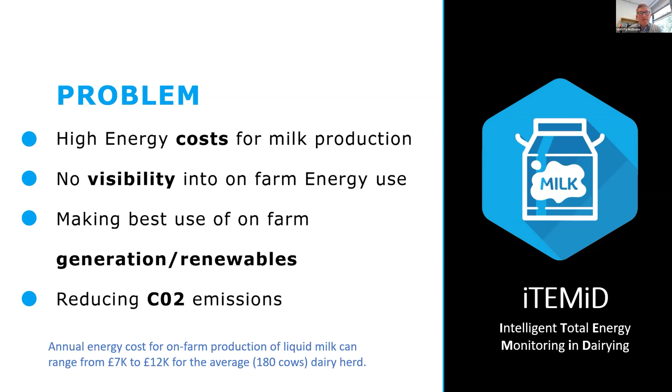And then if the farm had on-farm renewables, so if it had PV or if it had wind turbines, that was measured as well. And anything else the farmer had beyond that—farms have specific other niches and different bits of hardware—if there's something they wanted to monitor, we would do that as well.

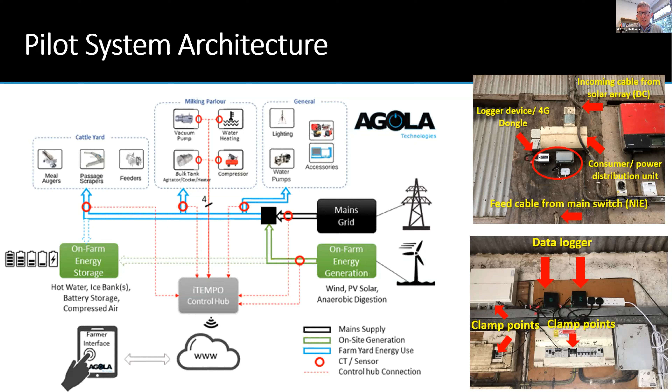Some of the things we took out of the initial analysis of the data - a lot of this was initially hand analysis through Excel and so on - in terms of the robotic farm, we identified an issue in late January, February, where the energy profile of the robotic system was increasing, and that manifested in a condenser issue within the robotic system. Once we identified that to the farmer, they could get the right service team, the Lely service team, out to fix that issue.

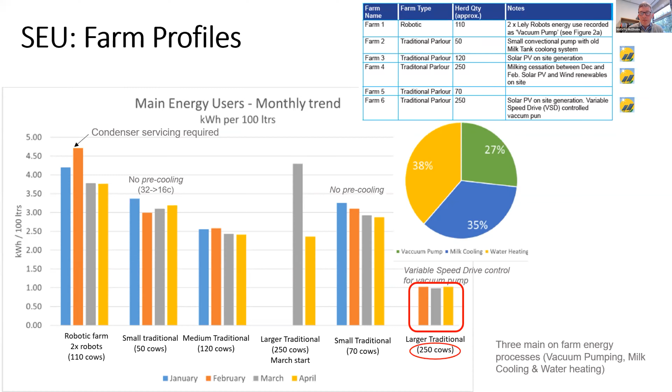So the obvious thing would be to time shift that energy use and use it either in the evening during milking, or more specifically at night for heating the water tank, because there's a similar profile on this particular day. The obvious solution would be to put in some sort of battery storage system so they could store energy during the day, charge the battery, and then use that stored energy to heat the water at night. But that comes with another significant cost, and farmers weren't looking to outlay that cost as part of this project.

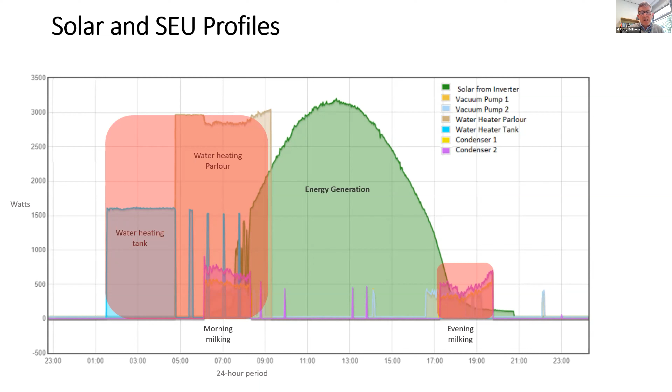So they're looking at other solutions, taking the existing systems they had and trying to maximize that energy generation. With that in mind, we looked at optimizing the water heating strategy within the renewable setup.

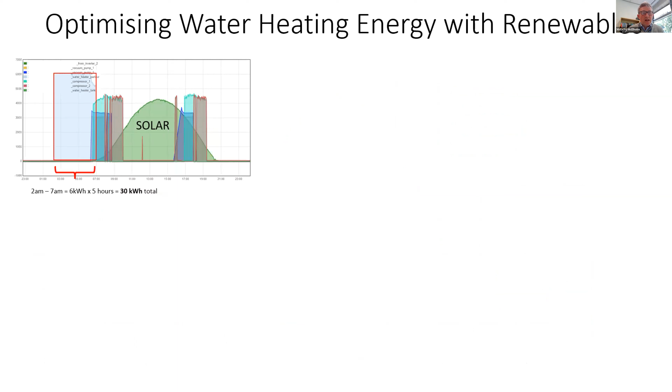Using that energy profile to heat the water, we came up with a controller algorithm and system to monitor both energy use and energy generation - what has been currently generated by on-site wind or solar - and use that to heat small elements of water. Depending on how much energy we had incoming from renewable sources, we could heat a certain amount of water and control the water inlet valve just to heat the water through the day.

This meant that when it came to nighttime, the temperature in the tank would have reached a certain threshold or level, and it would take less energy to heat it to the 70 or 80 degrees needed for the washing process.

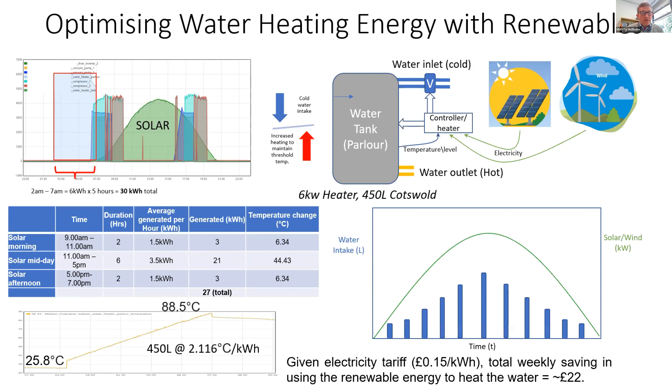The rest of the slide shows information around a typical day. During the morning and afternoon, the average generation was 1.5 kilowatt hours, totaling 27 kilowatt hours generated by the solar, which could have been used to heat the water during that time, rather than selling that generated energy back to the grid at a reduced cost. It's better, more efficient to use that energy on site.

We did some initial studies on this, and given a particular electricity tariff, there's a weekly saving of around £22, which doesn't sound like a lot, but over the course of a year it's over £1,000 to a farmer who may be spending £7,000-8,000 on electricity use. That's a significant reduction in their costs, and increases their profitability.

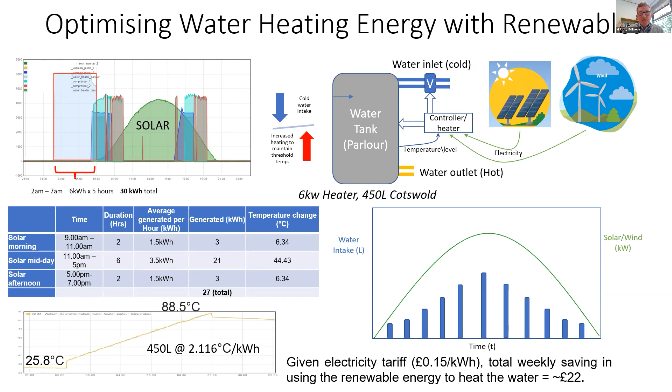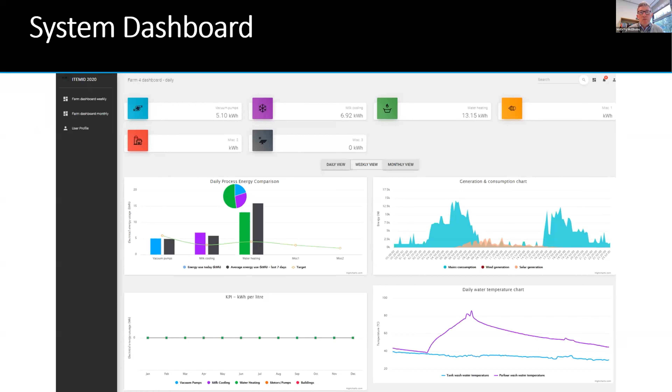In summary, this affords real-time insight into electricity consumption for the main energy users on a farm. It also highlights reduction approaches, such as potential pre-cooling using variable speed drives, and allows farmers to compare against each other in terms of energy use. It provides evidence for on-farm renewables to show the benefits of having solar or wind and what can be done with that on-site generation. It also opens a window for using automation and artificial intelligence to better analyze and provide interventions on the farm, taking some decision making away from the farmer, or at least using AI to identify issues as an alerting mechanism.

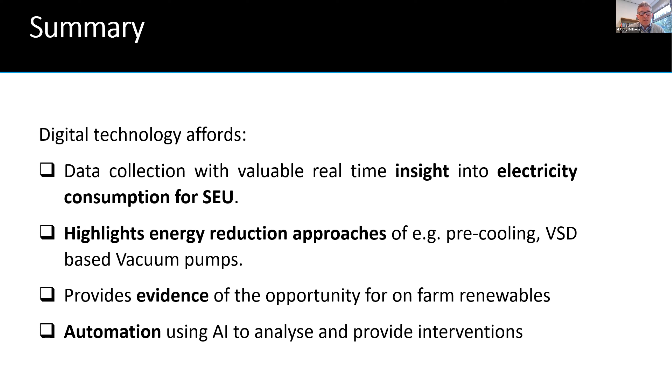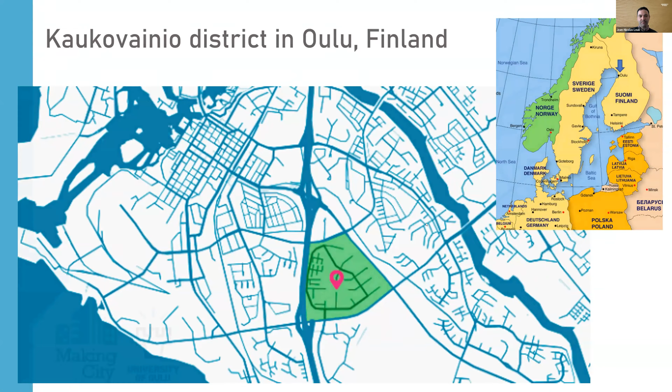At the moment, the supermarket is up and running and has been monitored for now about a year. The school and the buildings are, some of them still under construction, and some of them are already inhabited, and the monitoring process is going to start quite soon.

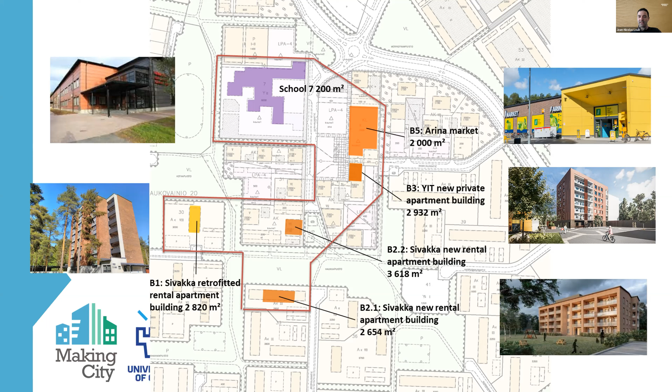So the presentation today is about how we came up all the way to building up a positive energy district, and the start of the monitoring, and how we set up the monitoring. We have to remember also that in the northern part of Finland, the design temperature is -32 degrees, so we have to consider that the heating part is quite crucial in this area.

The particularity of this project is that each building has a heat pump system that is connected to the return water of the district heating system. So we consider it as recovering waste energy that is going back to the power plant, and in that sense, it is considered as free energy to the positive energy district.

All of the buildings have PV panels on the roof, some with storage. The supermarket has a borehole storage system with a heat pump, and the buildings also have a large water tank with phase change material to increase flexibility in the buildings. So the overall target is to have the entire district as positive on a yearly basis.

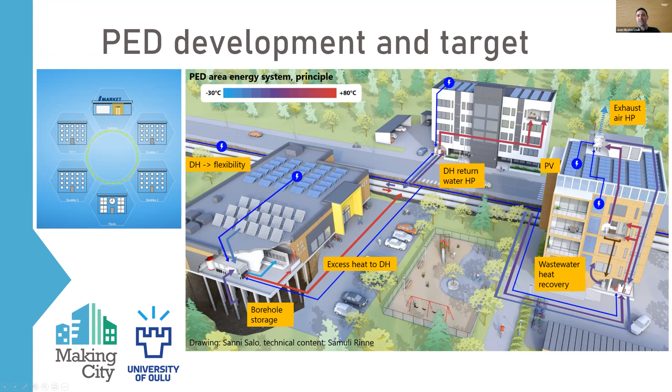As I said, the energy consumption is measured at the building level, and we have all the data at the building level. We are now implementing it at the resident level, so some apartments are going to be monitored more precisely. All of the monitoring process is done at the minute scale, so we are very detailed—that was one of the targets, to have very detailed information and measurements from each of the buildings and apartments.

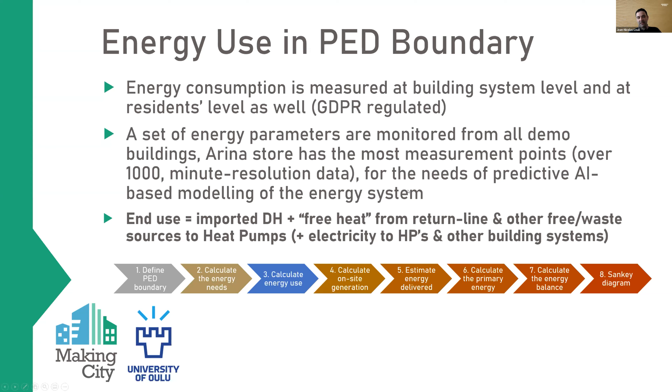One of the purposes is that we want to develop control systems and AI or machine learning control systems for controlling the entire positive energy district. The overall energy use is the imported district heating that we import into the PED area, which is geographically constrained, the free heat from the return line, and then the waste heat source for the heat pump system.

We have to remember that this positive energy district is not an islanded system, so it's fully connected to the network. Here we are balancing the energy production and the energy consumption to have a positive balance at the end of the year.

One of the good things is that the district heating here is using mainly biomass and hydro, and then we have hydro and wind as the main source for electricity. So the environmental impact of this particular positive energy district that we have in Oulu is quite low.

There is a virtual positive energy district from the point of view that in the calculations we also consider wind power that is produced outside of the PED boundary, but that is owned by, for example, the building owners—like Arina, the supermarket, that owns part of this production.

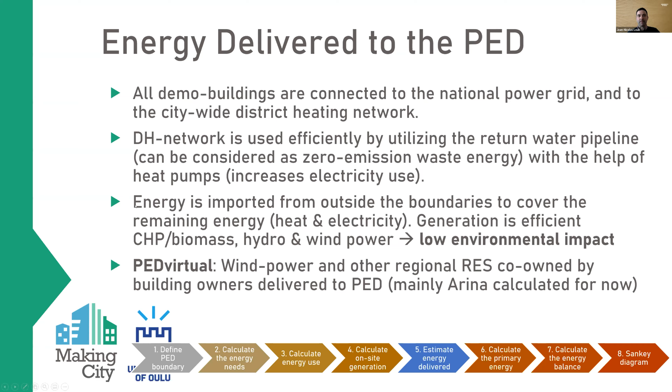Why monitoring? Well, on top of the projects, we measure what we do to see if it's actually what we're aiming for. Machine learning training is the most important for control purposes, to develop new control systems for maintenance purposes, but also for flexibility purposes—short-term flexibility, daily flexibility, and seasonal flexibility if we have storage.

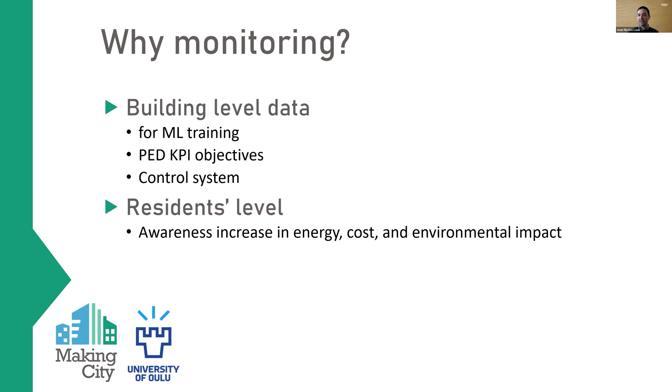At the residential level, each of those apartments that are going to be monitored starting next month—this is mainly to increase awareness to each tenant in terms of energy consumption in their houses, the cost associated with it, and the environmental impact. What we are also looking for is to find out if end users make different decision-making processes if they get access to environmental impact data and cost data, and if they can make a rational decision about the trade-off between the two, if this is a problem.

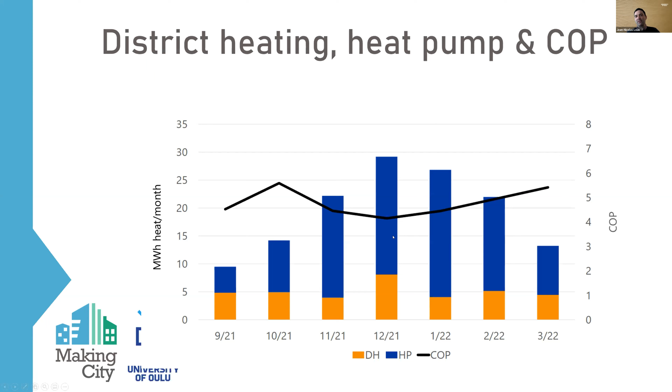These are some results that we have from the existing system. Here's the heat pump COP, coefficient of performance, that we have. Because we are using the return line from the district heating, which is about 40 degrees, we can actually reach quite high COP values, between 3.5 up to 5.5, depending on the month of the year. Of course the coldest month, last December, we reached maybe minus 25, minus 30 outside, but still the COP of that heat pump was pretty high and delivered quite good heat.

This is some data that we have from the PCM, the phase change material that is in the water tank—small capsules that can change from liquid to solid. On the left-hand side you have the temperature profile of the water tank without the phase change material: we heated it up to 60, 65, 70 degrees, keeping the temperature, then looked at the temperature loss of the water tank over time. On the right-hand side is when we added the PCM, and we can see this stair shape of the water tank temperature, where we can stabilize the temperature and increase the flexibility by about 100 minutes—1.5 hours of extra flexibility that we can have by using phase change material.

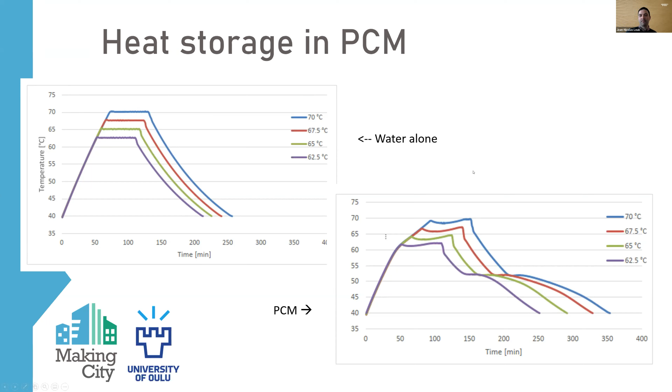One of our biggest challenges was to try to cope with GDPR, the data protection, as we are monitoring 1-minute resolution data in every apartment where we have individual people. So we can actually get access to quite a lot of data.

Here is the frame of data measured by VTT, the Technical Center of Finland, where they measure humidity, temperature, CO2, and power consumption. The power consumption is a plugged-in measurement device on the smart meter, and because the smart meter cannot access this low detailed information, we can access it remotely by bypassing the smart meter. But the energy provider is involved in the project, so it's all done together.

The building owner also measures the airflow and air pressure in the building, in each apartment. Only the water measurement, originally planned, was in the end not included in the project. All this data is stored in servers within Finland, and then we have a data controller that either retrieves the data back to the end users or anonymizes it for us to do research and develop models so that we can afterwards work on new control systems.

So this is our framework for coping with the GDPR and how we handle this matter.

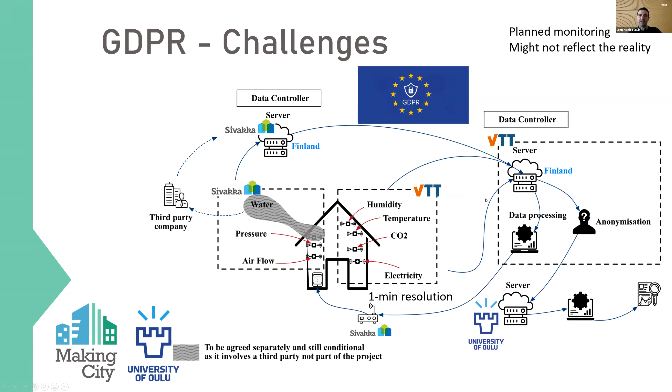This is the interface that the tenants have. In the middle you have the data from the PED, Positive Energy District, data from the environmental impact, and the pricing of the data. Up here is their interface. So the end users have direct access to the power consumption, heat, the temperature inside the house, and the humidity, relative humidity in the building. And that's their historical profile.

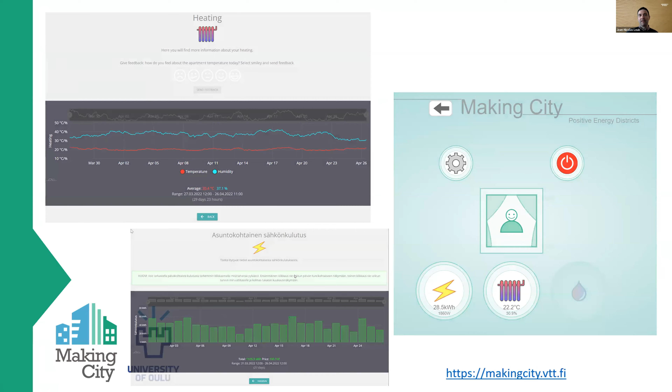But they can also have access to this kind of clock where they have both pieces of information: the inner circle is information about past CO2 emission levels, and the outer circle is the price. So they can get information that the next hour is going to be green but expensive, or if I wait until 11, or whatever time it is later, we can match both low environmental impact and cheap, or expensive but high environmental impact, or any combination of those.

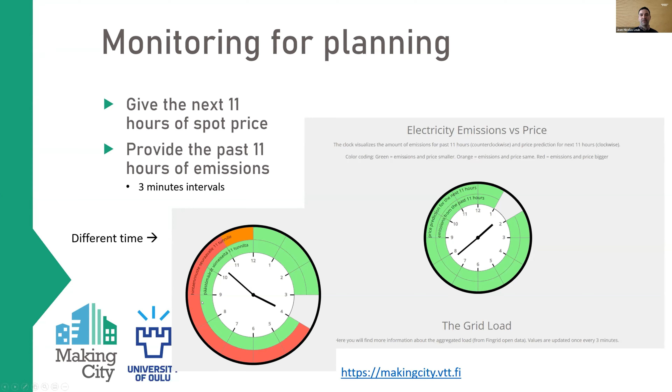Data is retrieved every 3 minutes, but in this graph it's on an aggregated 1 hour level. And of course they can all access the data, and that data is generated directly by the project on our own servers, and then they have access to it directly.

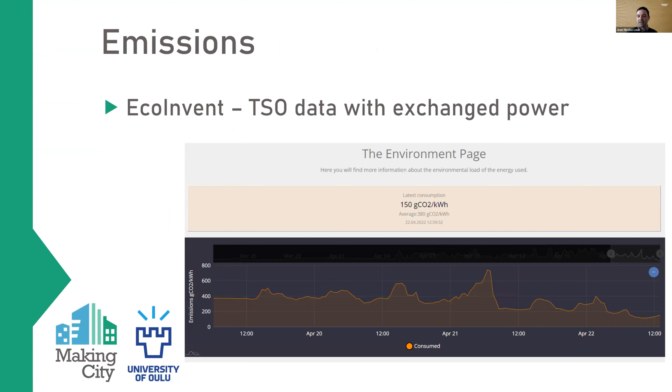What's coming next is that we have selected about 30 apartments where we are going to equip them, actually about next week. Next week we are going to have all the equipment deployed in all these apartments. And starting in May, we are going to start the measurement campaign for about a year, until next year.

And then from next year on, we will start to see what were the measures that were convincing to the tenants. Of course we will have regular meetings with the tenants on how they can raise their own awareness and how they can be actively involved in contributing to making new positive energy districts in the north and in other following cities, because we are followed by different cities in Europe. So that was the project in short.

Thank you very much, and if you have any questions please, I'll be happy to answer them.

We don't hear you, Nick. You're muted.

Sorry about that. Thank you very much, Jean-Nicolas, that was a very interesting account. I'm sure that will provoke a lot of questions. I see one there already. We'll get to it at the end.

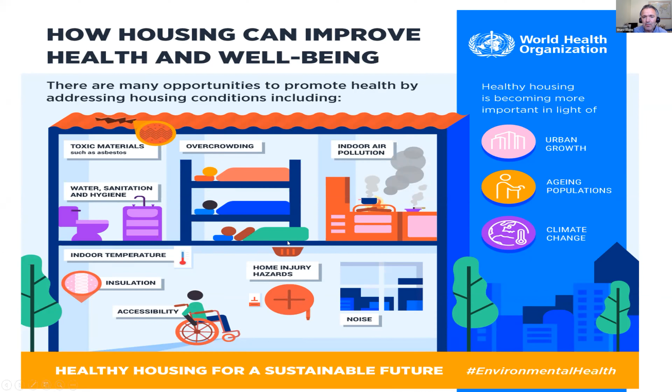So there's a whole lot goes into what makes a healthy home beyond what our focus has been, and certainly in my role, the focus has been more around the accessibility of the home than a lot of these other areas. And we probably do need to get better at joining the dots on that.

So what we're trying to drive strategically is much more of a focus on integration and looking at partnership working between the relevant players in the health and social care field. So you've got the health services, obviously, social care services. There's a major reform of social care services going on in Northern Ireland at the moment. We need to look at the housing piece and the assistive technology, be that community equipment, be that technologies to enable people to manage their environment, be that telecare type technology.

And I think if we don't join up all of those areas, they're going to have an impact. We can make people well through surgery and medication. We can put domiciliary care in to support them in the home environment. But if the home's not accessible and they haven't access to the right kit and technology to manage their care, then very often they can be existing, not living.

And I know of plenty of examples where people are being cared for and looked after in their living rooms with a commode beside the bed. You know, so that's not active living. That really is existing. So we need to get better at joining up those strands if we're truly trying to promote independence and quality of life.

So what have I said? The current focus, a lot of it has been on accessibility. And when I say accessibility, I'm talking about physical access to, from, and within the home. So looking at level approaches, doors and corridor widths, space standards in habitable rooms. And that is facilitated in Northern Ireland through an adaptations programme.